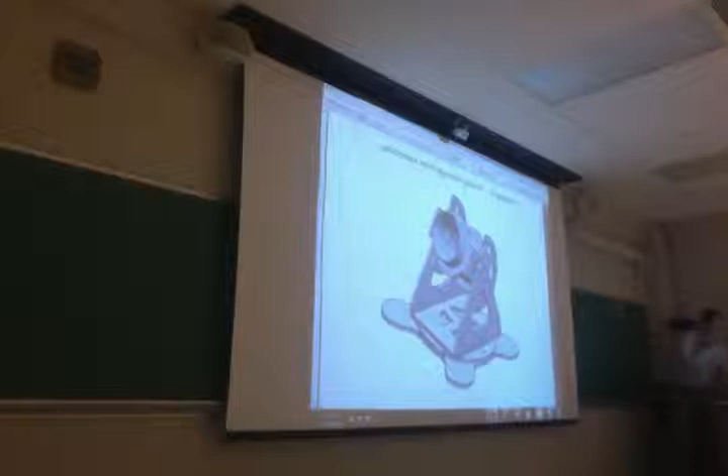The first thing we need to go over today is something interesting you can do with assemblies. This is pretty typical, as you'd expect. I've already assembled this and give you all the pieces, but I don't give you the assembly file. It'll take you like 10 minutes to put it together. It's not a big deal.

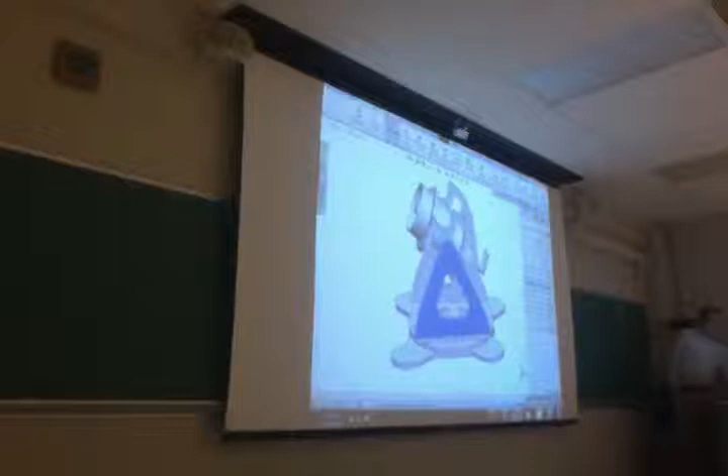You should have the appropriate degrees of freedom. The base should be able to rotate, and this thing should be able to pitch up and down. The missing components that you'd finish this off with to make it a real part—you'd put a gear drive so you can control pitch with a microcontroller or something. So you can put a camera on the back and follow some sort of star or galaxy and get a really good photograph of it.

Is that a wasp in here? Yeah, that's nice. Let's see who gets unlucky.

So that's what we're working on this week. This telescope, if you care at all, is actually one that I own. I was making this part a few years ago and thought, that'll make a good enough lesson part for people. So we're designing a mount for a real-world telescope. It's an 8-inch Schmidt-Cassegrain telescope—it's a reflector, and it's a nice little bit of kit.

One thing you can do with assemblies that I didn't mention previously, or even in previous years—I want you to try to figure out the difference between what this is, notice I can still move it, and this guy. What differences do you see?

Did you make the part from the assembly? Yeah, that's what happened. You notice these are dumb solids—they have no components in them. It's a part made from the assembly. You can save assemblies directly as a solid part, but you lose the ability to control the motion.

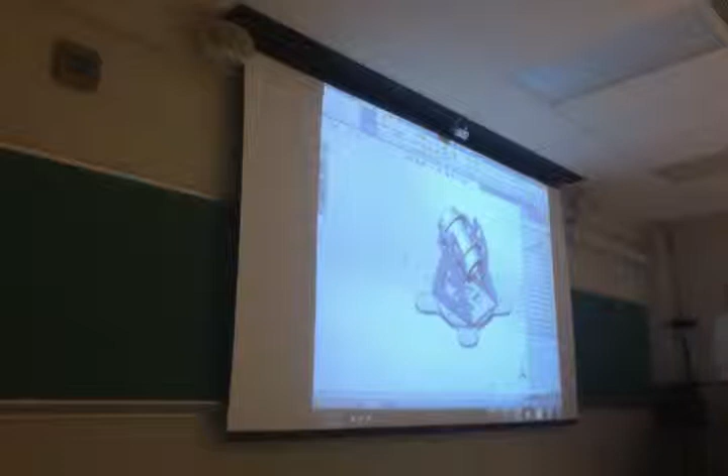They're fixed—you can't go here and change them. It kind of dumbs everything down, but it's a good way to handle things. Say there's something really complicated you've been working on, a whole formula car, and you want to send it to somebody to do some neat renderings of it. Or you want to send it to some other school or somebody else, and not give them full access to all your parts to be able to change them. You can send it like this.

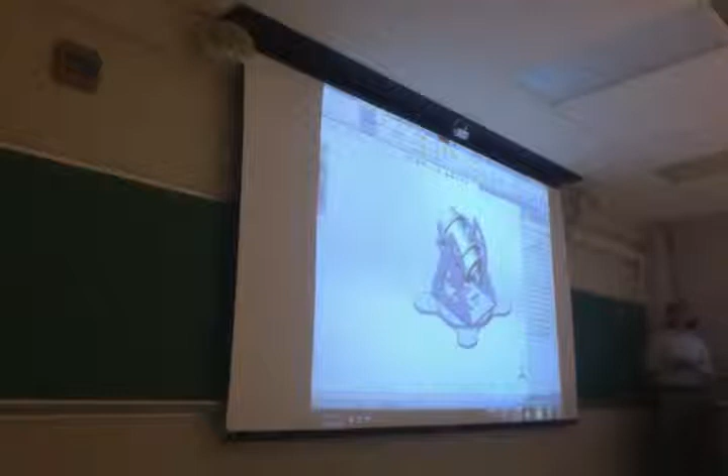So when you change it to a solid part, can you change it back to an assembly? Because I did that by accident on one of the homeworks before, so I had to redo it. I don't believe you can go backwards—it doesn't save all the mating information or all the parts with it. By definition, it just saves—I think it uses IGES files—it includes them and puts them together, so you can't even rotate it. It's just a bunch of fixed stuff. You can glance at it as a whole, but it basically becomes one big part. It kind of simplifies everything.

So the smaller file size can be helpful sometimes. These files can be kind of cumbersome for computers to deal with on occasion.

So anyway, to do this, it's quite simple. As you'd expect, just go to File, Save As. Whenever you get this question, it's basically asking if you want to check and make sure all the relations are good before you save it, and usually the answer is yes. Save new name, save as a copy—I usually do save as a copy. The descriptions of what the differences are is right there in the menus.

Instead of selecting solid asm.sldasm, go straight to this and choose part.sldprt. It's the same exact format as all the parts we've been making throughout the year, and so we'll save it as a solid like that. So that's how you do it—that's how you create these kind of dumb assembly files.

They can be quite useful if you need to share some information without sharing everything. This can be useful if you like a certain configuration of your assembly and want to take steps toward making a 3D print of it. You can put it into a part and add the base or whatever reinforcing material you need. Maybe you had a connecting strut on your formula car that if you just 3D printed it in plastic would snap and break, it wouldn't even hold its own weight. So maybe you need to beef that up a little bit, and it's easier to do it as a part. Anyway, that's how you do that.

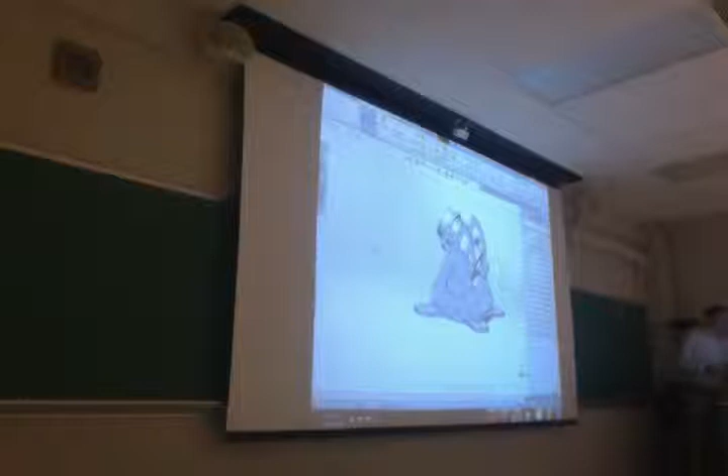We're done with the part version. Is this part of this? Yeah, it's a part. Just know that can be done.

One thing that's very useful in assemblies is you can create alternate configurations. We did that a little bit when we discussed design tables and parts, but even more common than doing a design table is alternate configurations in assemblies.

So again, you're in Configuration Manager, and all you have to do is right-click up here and say Add Configuration. It asks you for a name. I've conveniently also given you one of the telescopes with a Canon 7D, which is a DSLR camera. I'll just name this configuration that. So you see we have one configuration called Canon 7D camera and one called default. We have the Canon 7D activated right now.

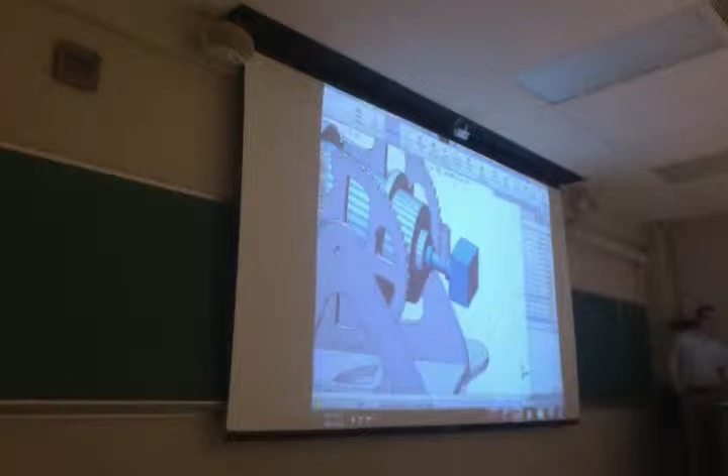So any changes I make in this tree, if I hide or show items, if I suppress or unsuppress items, that'll be saved in the config. So what I can do is go over here and unsuppress this 7D, which we've already mounted. You see I have both, there's two parts actually existing simultaneously in the same space. You have the Canon mounted camera and you have the telescope with just the optical viewing port. So I'll suppress the optical viewing one. Now this configuration, labeled Canon 7D, shows a box with space reserved for that camera. I didn't want to model every detail, every curve of the body of the camera, so I just made a cube that represents the entire volume of it.

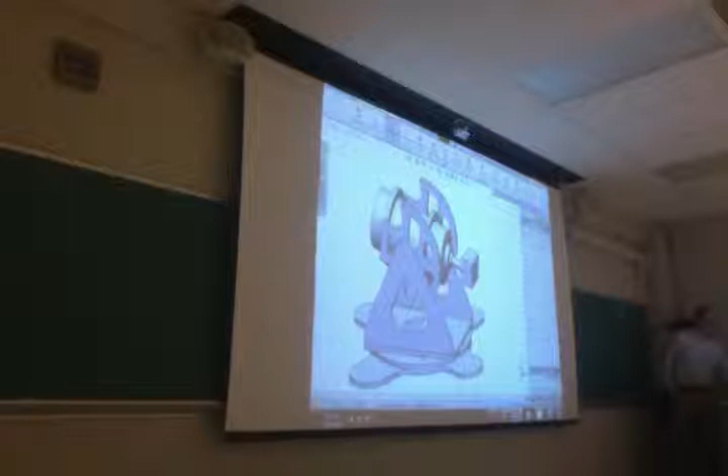So in Config Manager, if you switch back and forth, you're also switching back and forth between views. You have one that shows the camera, and one that shows the direct viewing application, so it's quite handy. You can see how that really helped you. Say you had different configurations for your Formula car, or different configurations of your AC-72 yacht you want to go out and beat the Kiwis with. You can switch between them this way and see what's actually different about them. So it's kind of handy.

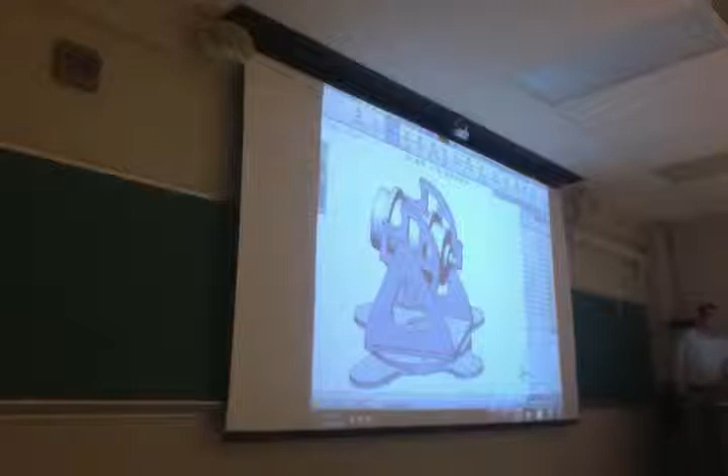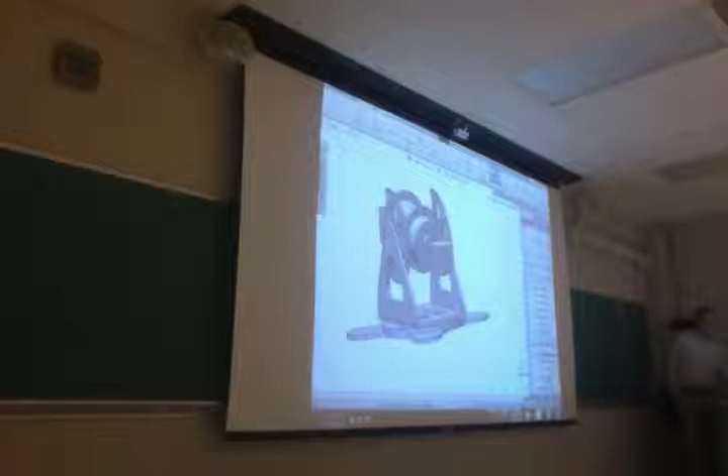Let me activate the camera configuration real quick. We have this guy open. I want to make sure that as this telescope is pitching up, like say I'm tracking some object going straight up in the sky, the camera isn't going to hit the base plate and get cracked off by the motors, breaking lots of expensive things and causing me to have a bad day. So right now, is that camera going to hit the base? Who thinks so? Okay, who thinks it's going to miss? Who really doesn't care? All right, so anyway, we can move the component and turn on collision detection. Remember, this is where we also did physical dynamics. You have the option to tell it to stop at collision, and also to beep at us. Where's that option? Sound, yep, it's already checked, okay.

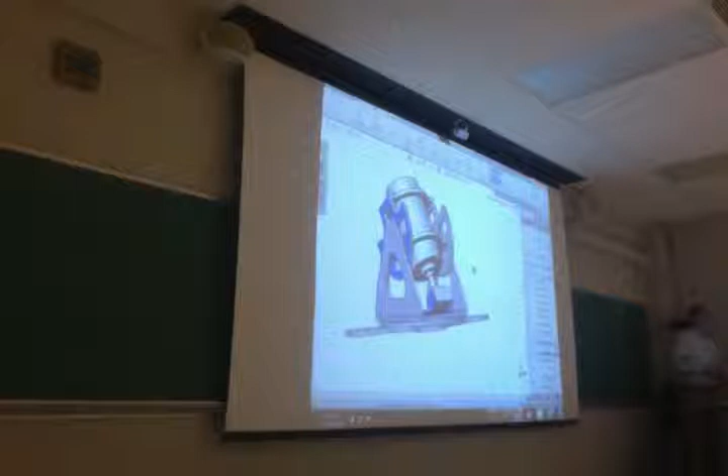So anyway, all you have to do in this case is grab the part, and then you see it in fact does hit. It highlights the surfaces and faces that are interfering with one another, so you can check your kinematics for conflicts. You can check your parts and mechanisms you design in the assembly manager to see if they're going to interfere with one another. So that's a good way to check things out.

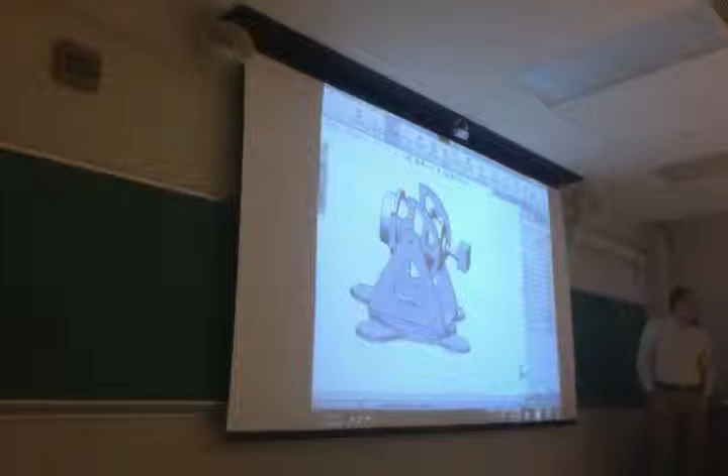What do we do if we want to fix that? We can't have that be a problem. What's the easiest, quickest way to go about fixing it? Take out the camera - then you can't take a picture of it. What? Make the two triangular legs solid.

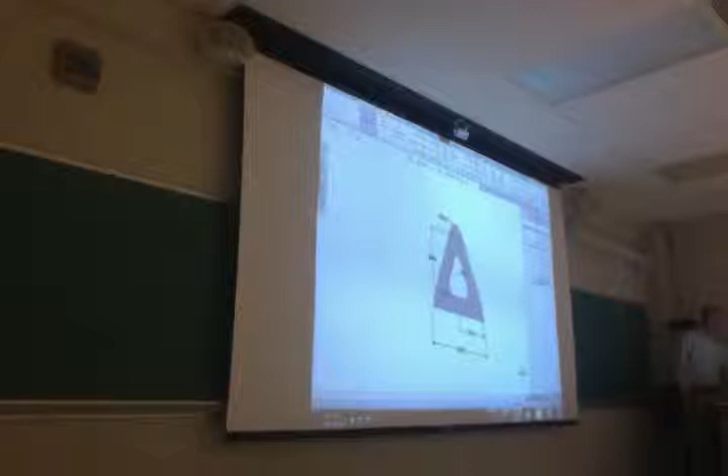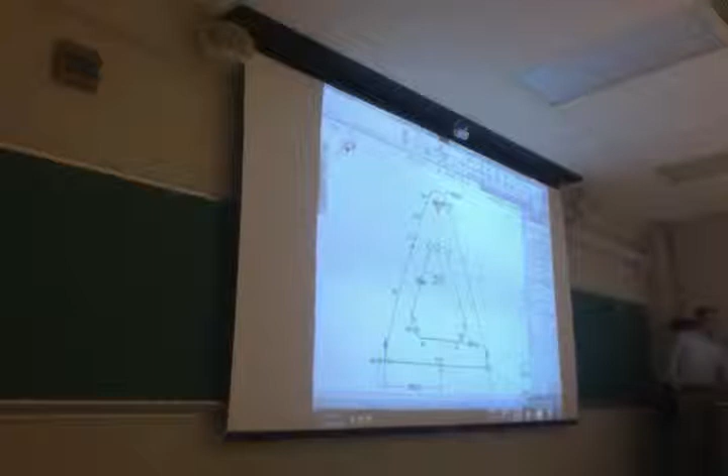This is actually a very simple thing to do. All you have to do is right click on those legs, say open part. If you're dealing in assembly, we have the part right there, and you can see it's all one boss extrude. You can view the sketch, edit it. I've got this set up, so all you have to do is go in there and say, 14 wasn't enough, let's try 20.

Everything changes - that's why you want to go about setting up sketches appropriately, so if you change one main dimension, everything else kind of stays where it should be. The relationships between dimensions are set up appropriately, so you capture design intent. You could dimension this differently - there are tons of different ways to dimension sketches. But if you did not capture your design intent through the way you dimension the sketch, you change that dimension and things just go crazy.

I'm sure you guys have seen that a little bit as you're working - you try to drag one line and the rest of the lines just go off into space. So yeah, that's the way to take care of that.

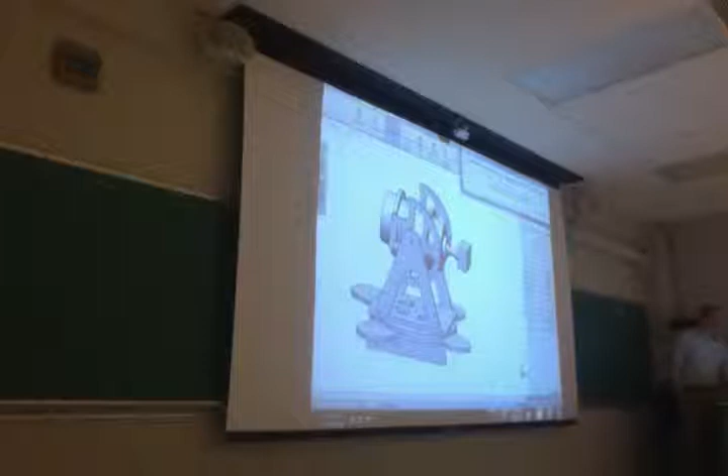Let's go back here. It tells us the model contained in the assembly has changed - do you want to update it? Yep. So now it's much taller, and obviously it's not going to be a problem. Spin that thing around all we want. For the sake of making the drawing, I'm just going to undo those changes.

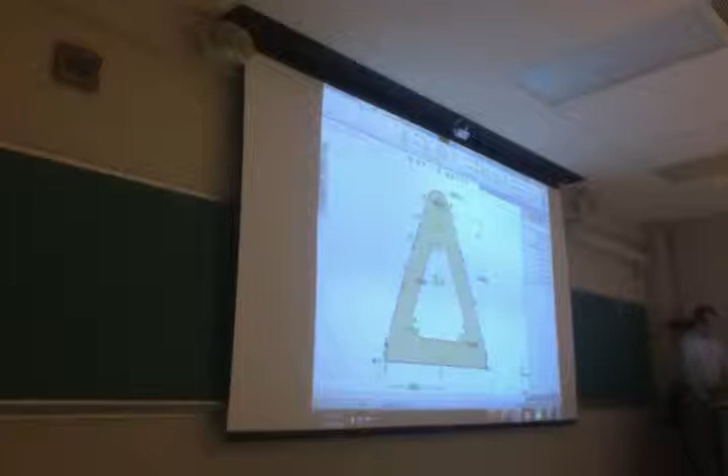We're going to leave it interfering for the moment. Switch back, let it re-update and re-evaluate - that's what it means by rebuild. You notice when I switch back, those arms are no longer on the base plate. Whenever it went and rebuilt all the constraints, it realized I had to move everything back. So that's what's going on there.

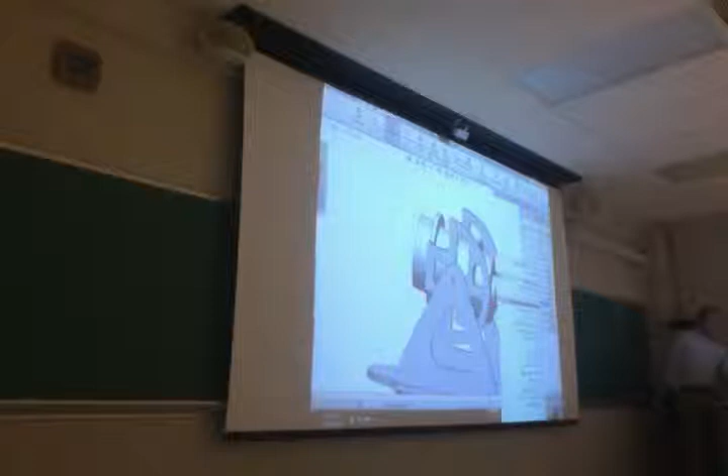I have a question - could you put the camera on top of the ocular viewing thing? Like the other configuration, where it's got the L, and then put the camera on top of that? Could you? Yeah, I mean, you certainly could. Some people definitely do that.

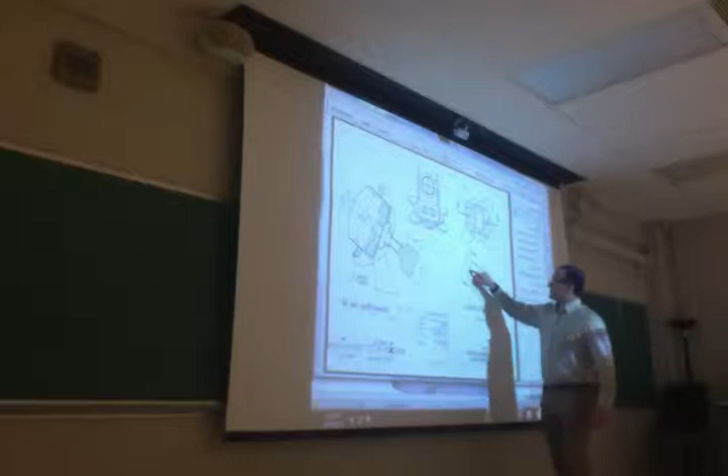Just as an aside for optics, the reason why they oftentimes get the straight shot right into the mirror - the mirror is even modeled. Let me pull up the PDF you guys have to make. Okay, right here, on the right side, the main bit of light comes in. This is the main reflecting mirror, it's parabolic, or roughly. Then you have one more mirror up here in the front, this little disc. So the light comes in, bounces off the back, hits the disc, and then comes right into the camera. The reason why astronomers mount the camera directly back here, instead of going through another bend, is that inside that 90-degree bend is another mirror, so 3 mirrors total.

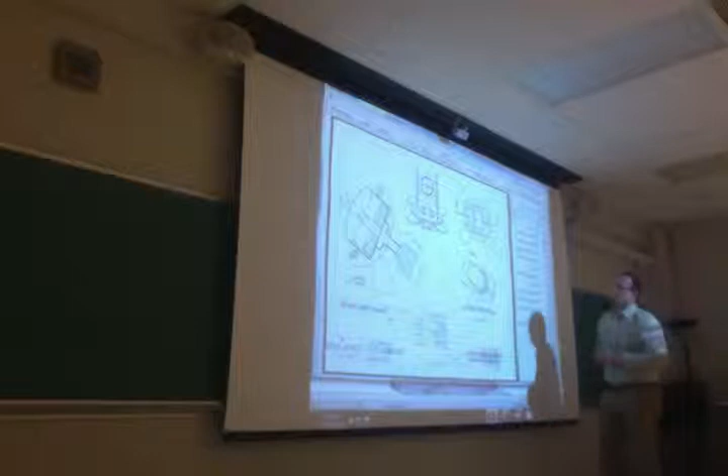Every time you bounce light off something, that mirror will absorb a fraction of light, and it messes up the pathing. That's why telescope guys are so persistent about the shape of their mirrors, because even a little tiny bit of roughness really messes up the image. So the fewer bounces you go through, the better off you are. The fewer lenses you pass through, the better off you are.

So that's why they do it optically, but yeah, you certainly could to save some space.

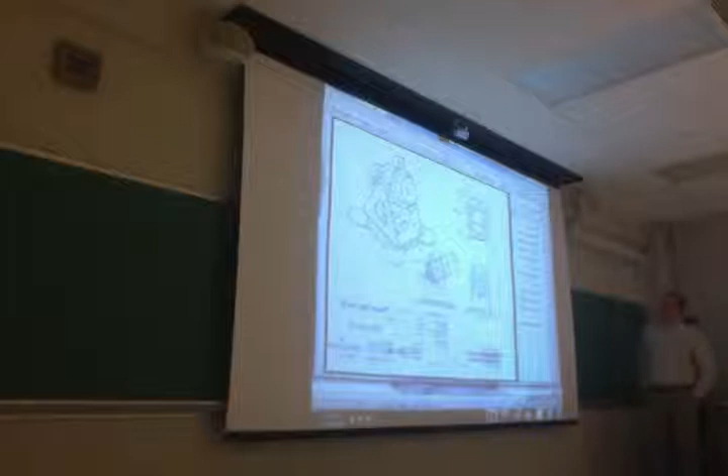So this is - I went ahead and pulled it up. This is the drawing you have to recreate this week. Once you assemble a telescope, this is pretty straightforward. This is what you did last week with a part - it's just rehashing the same things you've learned to do, but with an assembly. It's not anything different.

May as well go ahead and create that right quick. I'll just go to File and make drawing from assembly. It's telling me that I already had that made, but I think it's A-size paper. It's like, are you sure you've already done this?

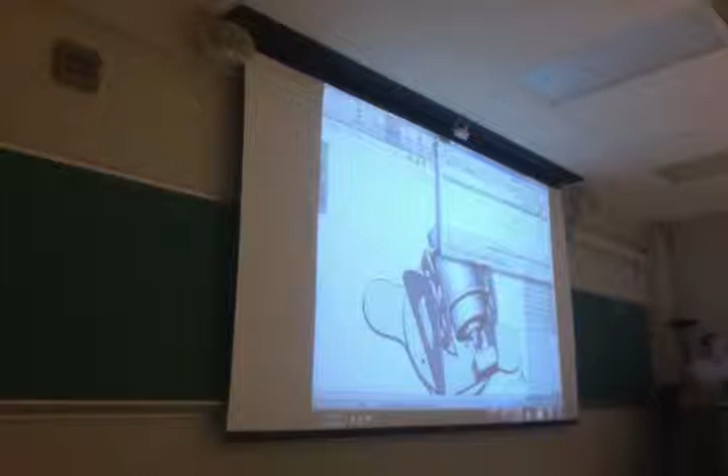Go to model view, just browse for it. This is what I wanted to show you - remember, the most helpful button I know of when making drawings. Whenever it asks you to make a drawing first, it just gives you the box. Always remember to check preview - it's going to save you a lot of time to see which view you're actually dealing with. So in the actual preview that we want, we need probably the front view.

I have to go. The reason it's messed up is because in the actual SolidWorks file, the orientation is a little bit off. So rotate this back to be square. I could certainly orient this any way I like.

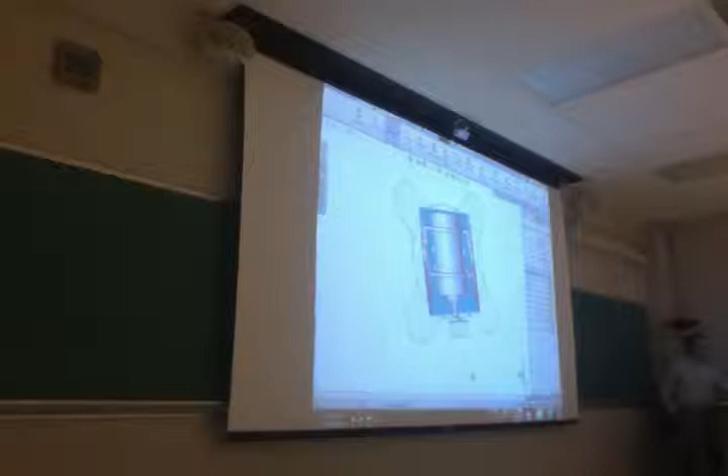I can update the drawing. See the changes propagated. So having this oriented properly is going to make your life a whole lot easier whenever you make the file. So let's take a look at what we need to finish here. Orientation is just highly wrong. Show this side. Just warning me that the dependent views will change as well, and I'm fine with that.

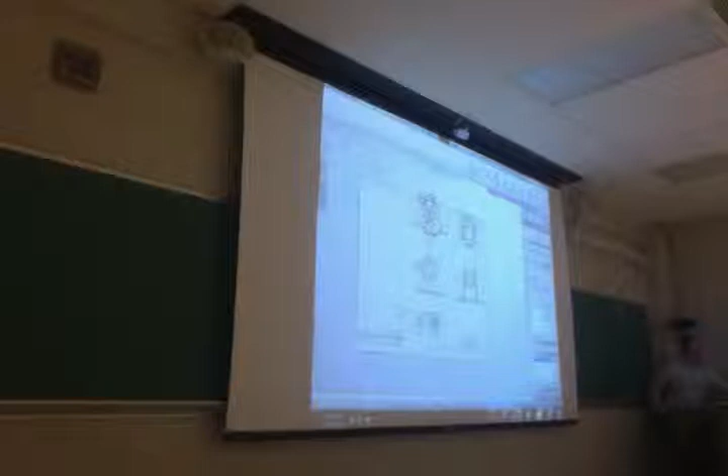So you see, what is it called whenever the other views move with this one? What is it in SolidWorks that keeps those? Is it the parent view? That it deals with that, yeah. The one that I'm moving right here is the parent of the subsidiaries. But what is it called that we need to break if we want to move them around independently? Alignment, yes. The isometric view obviously doesn't care about alignment.

In the drawing, we have the isometric at twice the scale of the others. So what do I do to change the scale of the isometric? Click on the object, right click on it. Or you could right click. Easier way to change scale: just click on the view, go down here and use a custom scale. So do 1 to 8, or whatever I like, to match scale.

How do I change, I believe in the view, in the drawing, which is extraordinarily tiny, this is showing hidden lines in that subsidiary view. How do I get it just in that view to be hidden lines?

Right click on it, show. Right click on it. Do what? Go to show, go to display styles. Push the blue box on the side screen. Do that, or you just click here, you click that. Which honestly, using the menu here over to the left, you've got a lot of options there, it's probably a quick way to do things.

Right now, I still have that poorly aligned; I would probably try to do a better job lining that up before starting the drawing. I was just going through this, how do I create another sheet? Because this one, we'll just say that's good enough, I'll add the dimensions, you guys get the general idea, don't waste your time. How do I add another sheet to this? So this is a lot of review this week, because it's just exactly the same as parts.

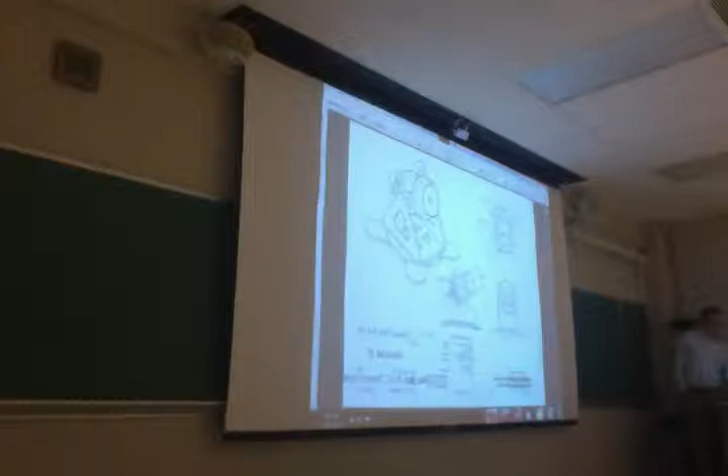All right, so let's look at the second page. What do we have to do on this? Who knows how to make that view? Oh, Exploded view. Exploded view, so you get to the back. You said you do know how to make it? You're very confident. I know how to make it in Inventor, but not SolidWorks.

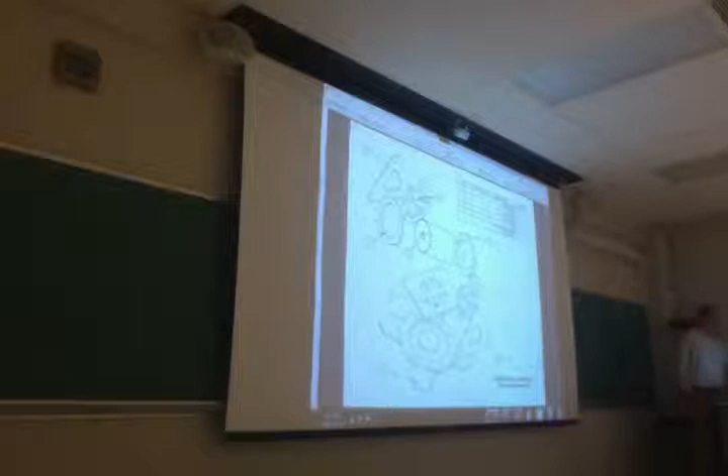It's actually quite easy. There's no need to go back and actually go through making another, what would I call it, another assembly or exploded state. You just can use Create Exploded View up there. You just click on the exploded view button, and it brings up this dialog box, which basically allows you to grab the parts that you've assembled and move them in a single direction.

So we'll just start, like what would be a good part to kind of keep centered? Think about when you ever do the base. The base, right, okay. So let's keep this base, the rotating one, fixed, and we'll take this one and move it down a little bit. So you simply click on it, move it green down.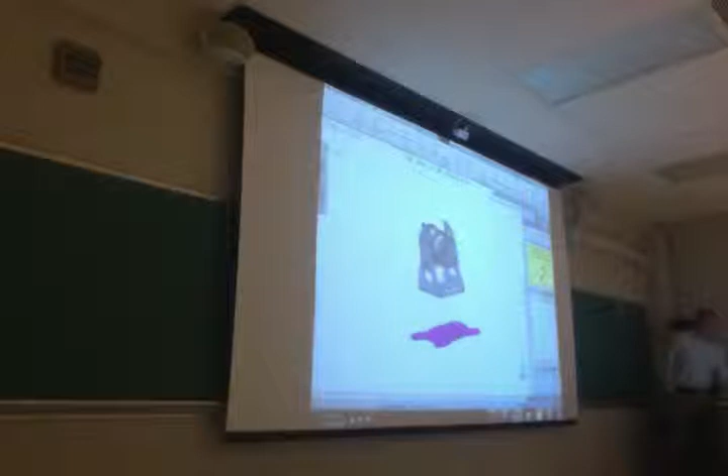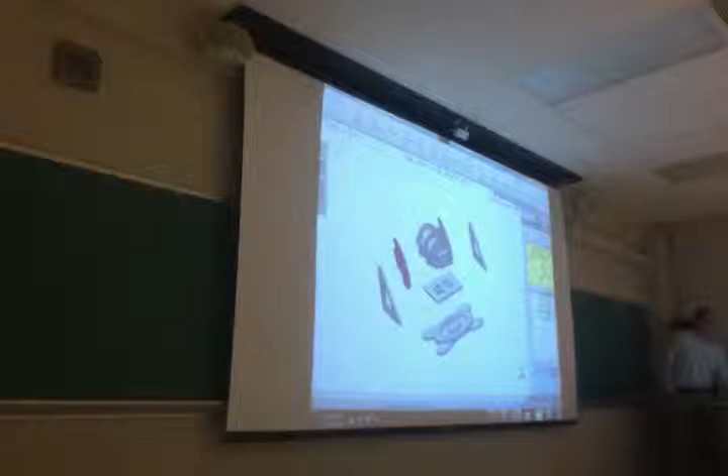Then you can click these sides, click on the red arrow, pull it out. You can do a controlled distance, but this is just stupid easy to do. Drag it out. Oh, come on, Hayes. There we go. This isn't a problem, it's pretty easy to do, even for really complicated models. You can drag this and push it straight out. In fact, is it tilted a little bit? I probably shouldn't tilt it.

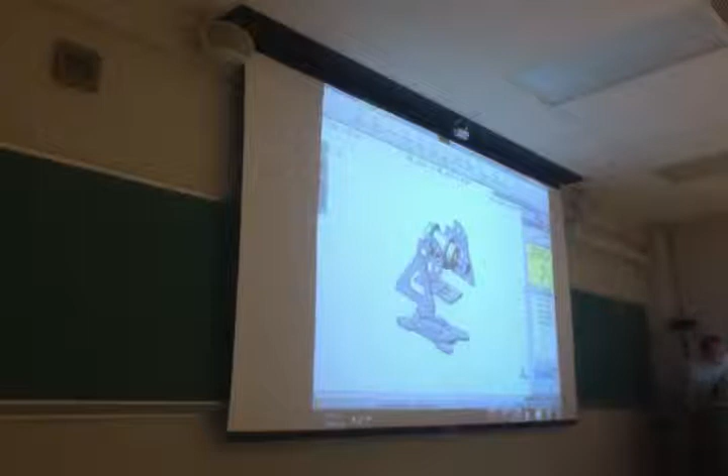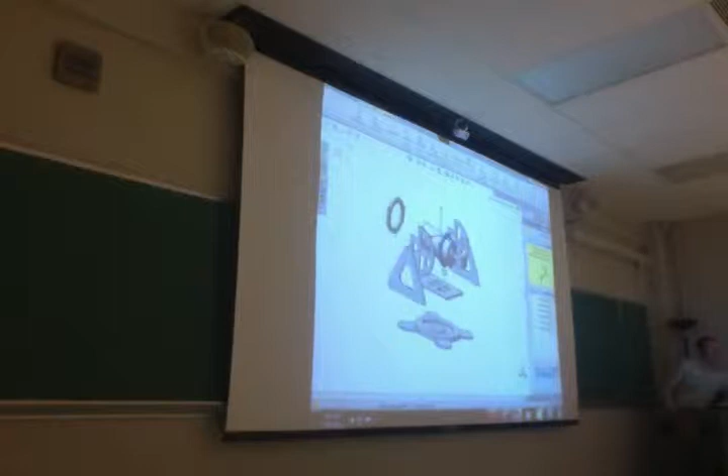You'll see that I'm only getting cardinal directions when I click on this, but if the telescope was pitched up, which this one is slightly, I should have pitched it up more to be more descriptive before I did the exploded view. Notice when I slide this forward, it's actually starting to interfere with the part itself—it's not going down the axis. So let me delete explode step 7 to go back to where it was.

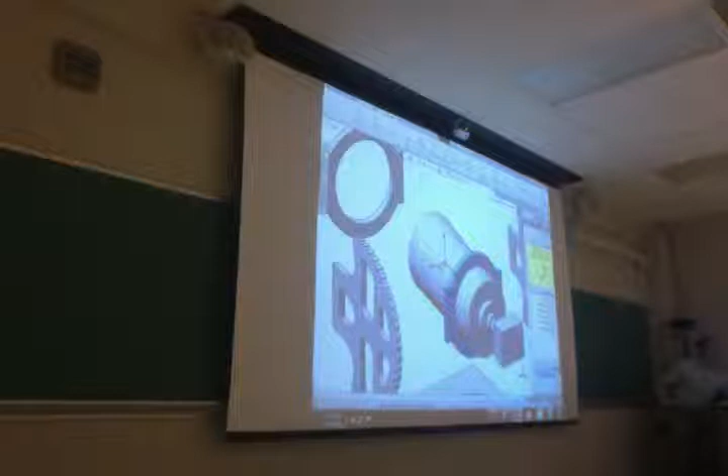If I want to move that directly down the axis of the telescope so it slides off like it would in real life, right-click on this hub—this is a good note to take because I get a lot of questions on this every year. Right-click on that hub, say align with selection, and select that back face. Now that blue vector is perfectly aligned with the telescope, and there you go. So now it's no longer going to interfere with it.

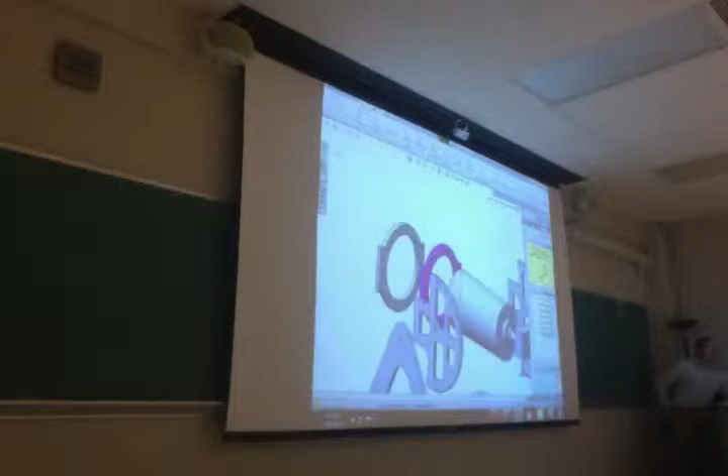So you see the difference between the one that I dragged off straight in the X direction and the one that I dragged off axially around the telescope. That's all you have to do to create an exploded view.

One thing that's kind of nice is if you go to Configuration Manager, open up that tab, Exploded View 2, you can animate collapse, which will basically undo everything. You can save this as a file, as a little video if you wanted to.

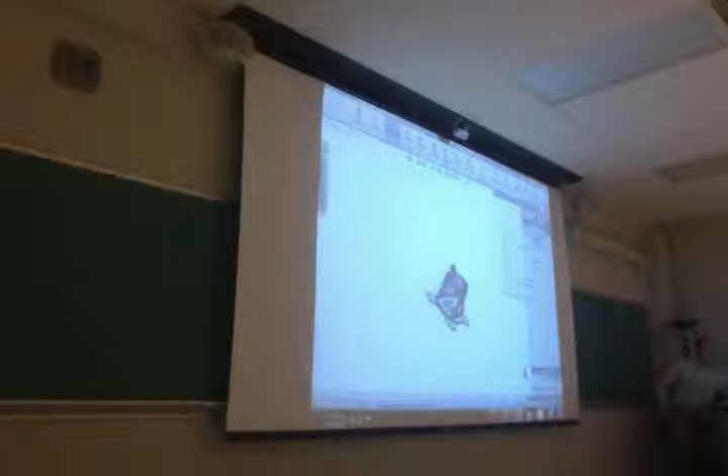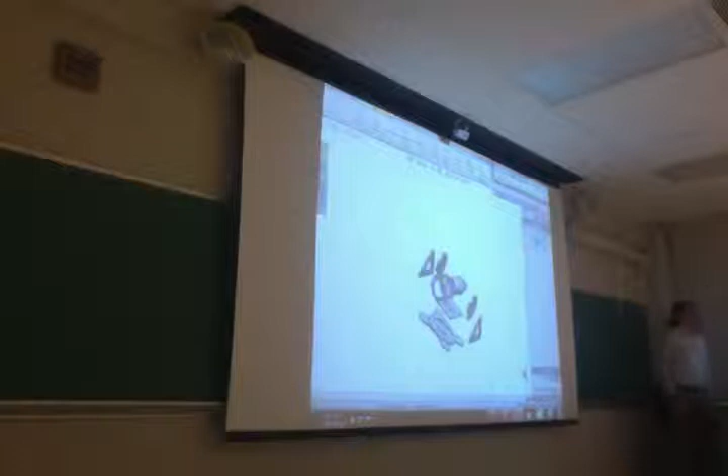Probably the more interesting thing is you can animate the explode, so it shows your device coming apart, or you can show it being put together. That's something really easy to do, something that really kind of wows people in presentations, and it takes about 4 seconds to make. Keep that in mind.

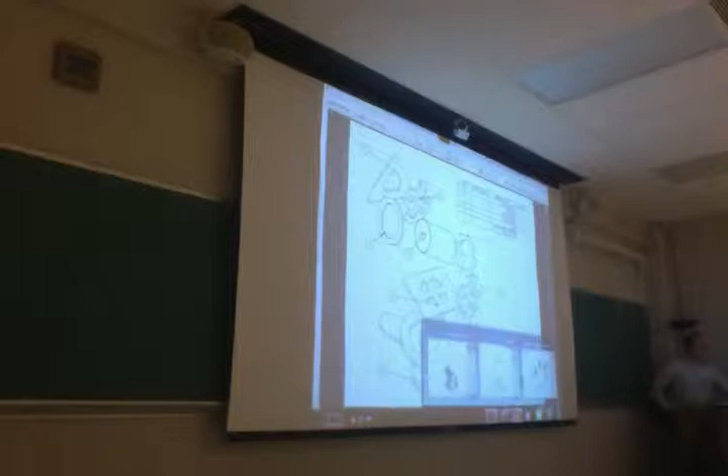So, adding the exploded view to a drawing is the next step—we'll create sheet 2. One other interesting thing about sheet 2: where did the format go? All that big block of information down here is gone. A lot of times I like to keep drawings clean, especially if they're an informational view like an exploded view is—it's not necessarily a dimension drawing. So you just grab sheet format 2 and delete it.

It's gone. Annotation, put in a model view of the simple telescope. Notice you have options here—you have the configuration you want to use. We have the default showing the direct viewing for optics, and you have the camera configuration. Underneath that camera, you have the option to either show it or not show it in an exploded state. In this case, we definitely want to show it exploded, so there we go.

Change that scale a little bit. I can make it go solid if I wanted, but I'll keep it this way—12, I'll go bigger, 8. Yeah, that looks great. How do I rotate this view?

So I need to make it look like this, but it's facing the wrong way—towards the top of the screen. There you go. When you click on that, you can finally spin it around. Whenever I tried to do that on my homework, I was never able to.

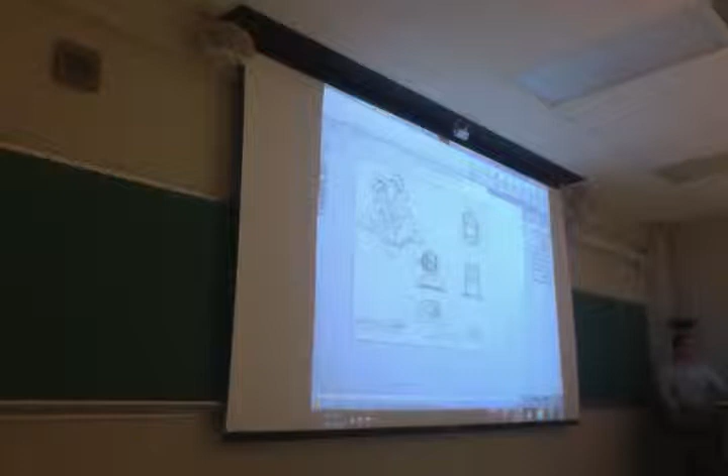Click the green checkbox. Right, that's the thing that happened there. Remember how I made this isometric view as a child of this drawing? If I try to do the same thing up here, I get your problem—notice it won't let me click the green checkbox. You can only shift independent drawing views, because if you do it in the traditional 3-view drawing, you get a front, top, right.

And the isometric view—I believe there's no perspective in isometric usually, but the lines are angled at 30 degrees, something like that. There's a standard it's trying to follow. That's why it doesn't let you mess it up—it's trying to protect yourself from yourself.

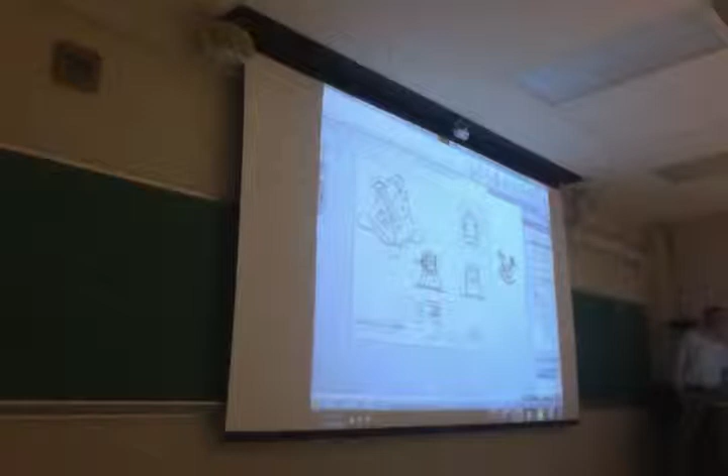So if you do want to maneuver things, just go to insert an independent model view, isometric, and then notice that one's still exploded because I didn't check the right box, but you can manipulate that all you want. So that's what's going on.

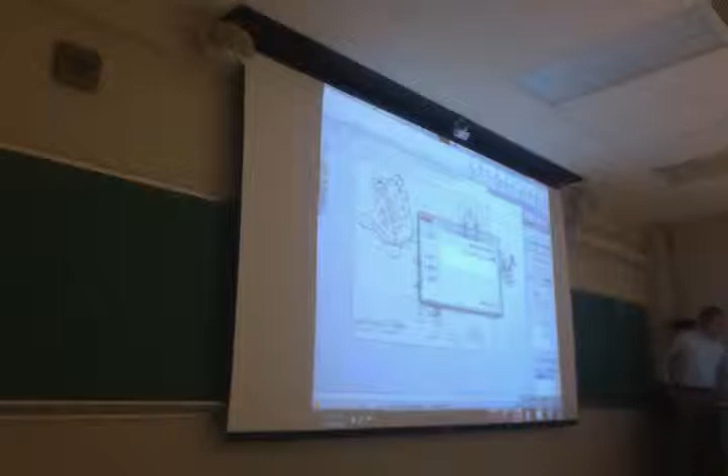All right, so we have the exploded view in, but now we have all this other junk we need to add into it. These drawings are actually very, very useful—you'll do them a lot for parts that have to be assembled for people. This up here on the top right is a table called the bill of materials. They're a huge pain to keep accurate if you have to do this manually—like how many screws do you need, how many bolts, how many pieces of wood go into your design, how many square feet of this or that.

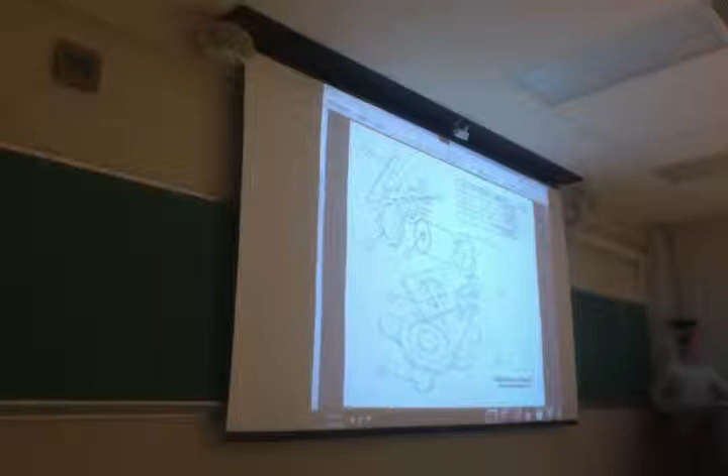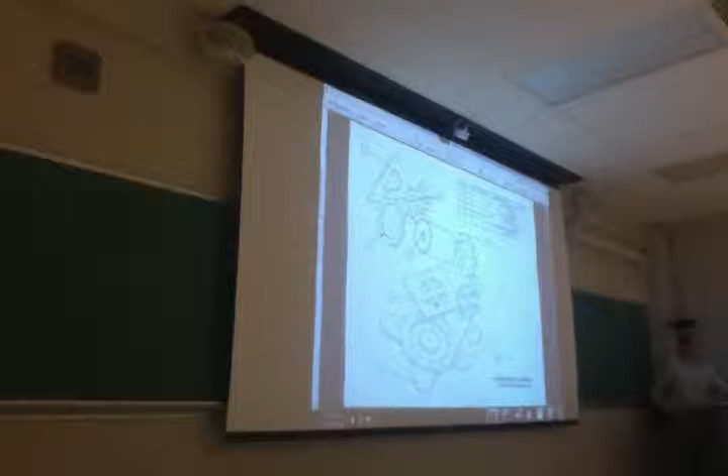How many Legos in the box? You can have a bill of material built for a Lego set. It's a perfect example. They're a huge pain to actually do by hand, but thankfully SOLIDWORKS does it all for us.

It knows how many of each part are already in the assembly, so why wouldn't it just make it? Go to Insert, Tables, Bill of Materials. Select a drawing view to specify the model for creating it. Which view do you want me to create the bill of materials for? Exploded view makes a lot of sense. Use the standard bill of materials template, top level only.

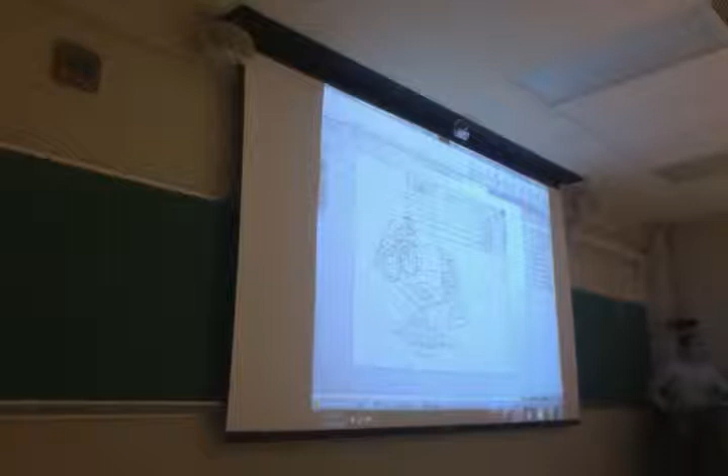Usually all these options are just fine, though you can change the weighting of lines and everything else if you want. I'm not too worried about it. We'll just click OK, and it's done. It automatically references the assembly and tells you how many of each object you're going to need. If you change the assembly or change the view, it updates the bill of materials.

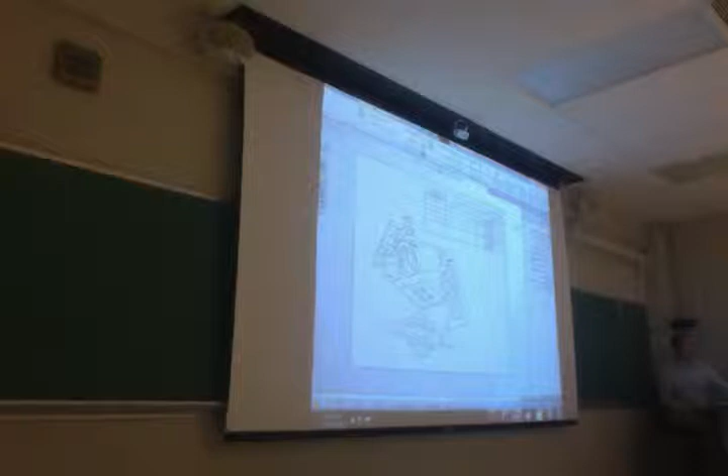The ultimate awesomeness of this drawing feature in SOLIDWORKS is that you can go to Annotation, Auto Balloon, click on the drawing you want, and it automatically references the bill of materials. It tells you which part belongs to which line, so you can very quickly idiot-proof the assembly of your design.

It's a very common task that engineers do all the time, so they've pretty much automated the entire thing for you. I guarantee knowing how to auto balloon will save you five minutes on your final exam. So know how to auto balloon and manipulate these things, because if you try doing this by hand, you have to make sure the numbers correspond and everything else - it's a lot.

You have different balloon alignment options - you can have them all go above, below, to the left, or to the right. I kind of like the surrounding option. Just say okay, and then you can manipulate these a little bit, moving them to reasonable places. Obviously, off the paper is not going to do you any good.

I'm sorry. Thank you. That's a very nice courtesy laugh.

Anyway, so there we go - bill of materials. You can insert descriptions. If your part file has a description in it, saying what it actually is and what it does, or how you put it in, that'll show up.

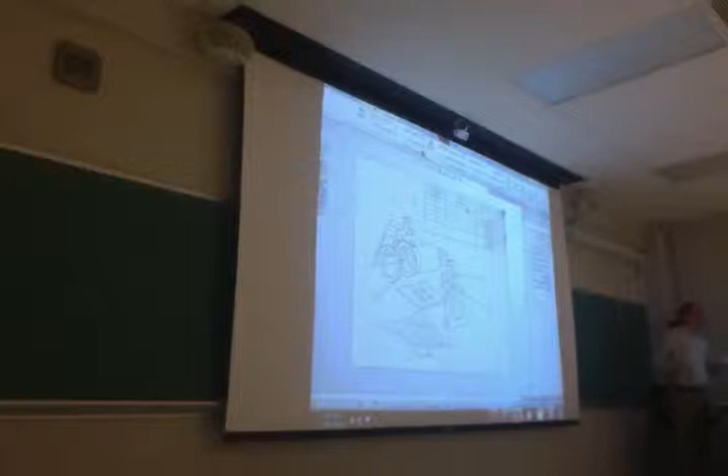You can change some other columns if you really get into drawings a lot in SOLIDWORKS. Under bill of materials, sometimes the bill of materials will be pages long just in and of itself, with no pictures to go with it - just 18 pages of stuff you have to buy to build this part.

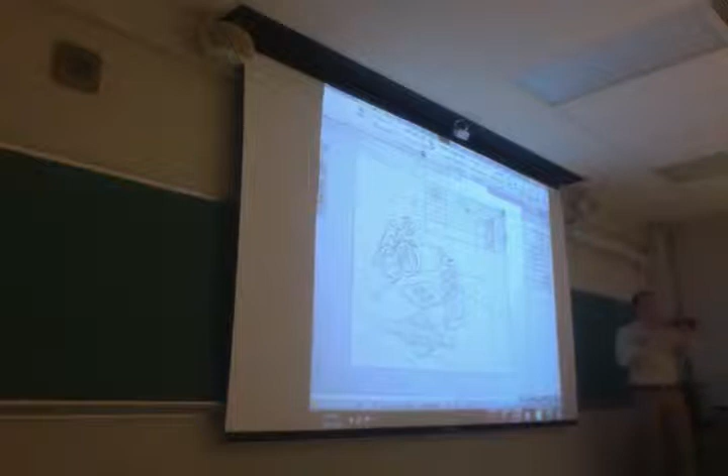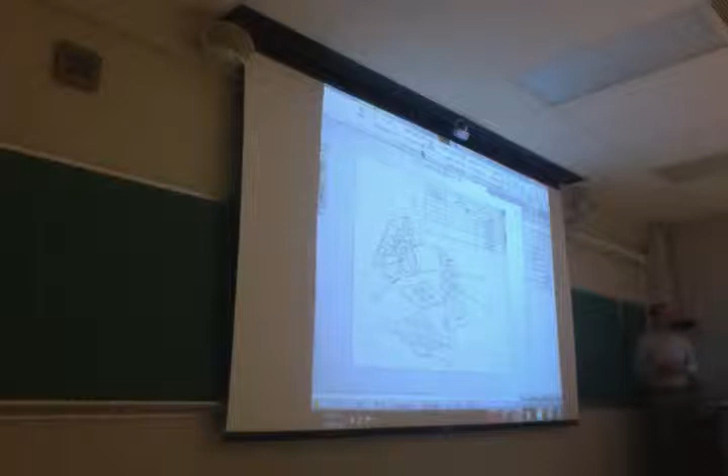One thing that's really helpful, especially with aerospace design, is that you can create a column for weights. You can list not only the parts you need and how many of them, but how much each one weighs, and how much a subassembly should weigh. That's really good for keeping track of the total weight of an object as you're making these parts and telling somebody to go get things - are you on spec? That's a good deal.

So delete format, we've done that. Section cut - we'll make one less drawing down here. What you don't need to put in. So page 3, we're kind of back to the standard type stuff again. Section cuts - what is this called?

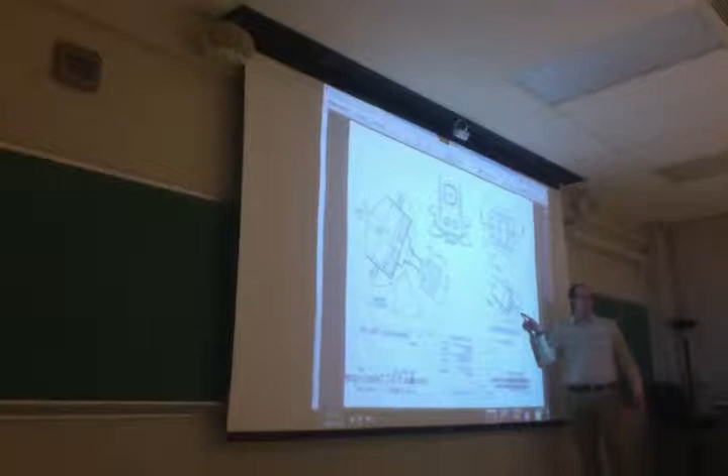This whole drawing is a cross-sectional cut, but specifically circle C - that's a detail view. Obviously that circle C pops up on the right side with a different scale. One thing you will have to add in is the crosshair in the bore of the telescope up there.

2012 made that quite easy. Whenever I did this work yesterday in 2013, it flakes out for whatever reason, but I'll show you how to get around that, because sometimes you just have to brute force a drawing.

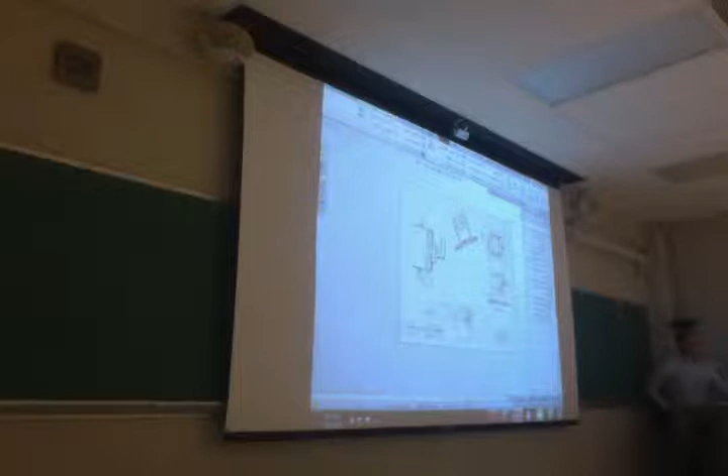Restart the computer. You can go ahead and turn it off, turn it back on again. Alright, well, lo and behold.

Okay, so which view do I need? I need the top down view. Let's look for that. Okay, so that works just fine.

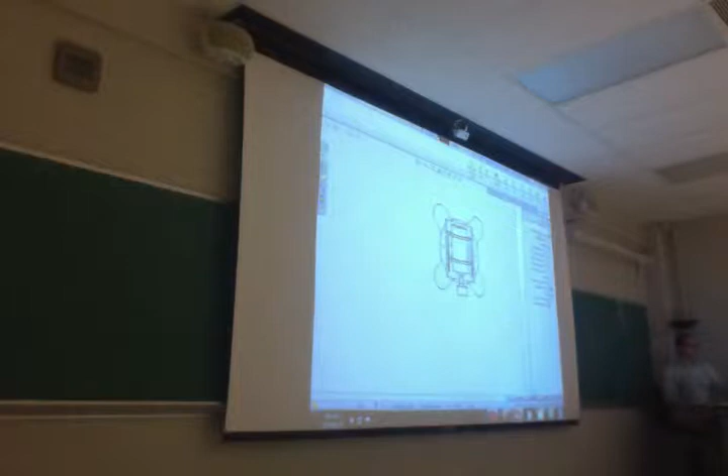The problem is it's rotated. Let's just assume for a second I have that lined up so the telescope is actually straight. Again, why is it not straight in my drawing? Because in the part, it's not... oh, that's not the part. I guess I have the part closed. In the part, it's not straight enough. You can go ahead and add a mating constraint to do that. It won't be an issue.

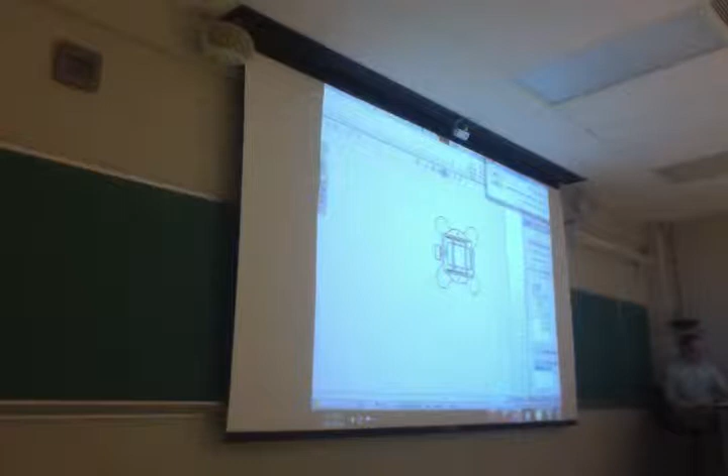Okay, to rotate this, you can simply click on it, right click, and you have the 3D rotate up here, or you have the 2-dimensional rotate. Click 2D, change the drawing view angle by 90 degrees. Apply it. Well, that's the wrong way. So negative 90, apply that. All right, good. So now we're pointing in the right direction.

Do the section cut, we do as we always do, section view, horizontal, good enough. Good enough for teaching. Oh, actually, there we go. So now we have the section cut view of the telescope down there.

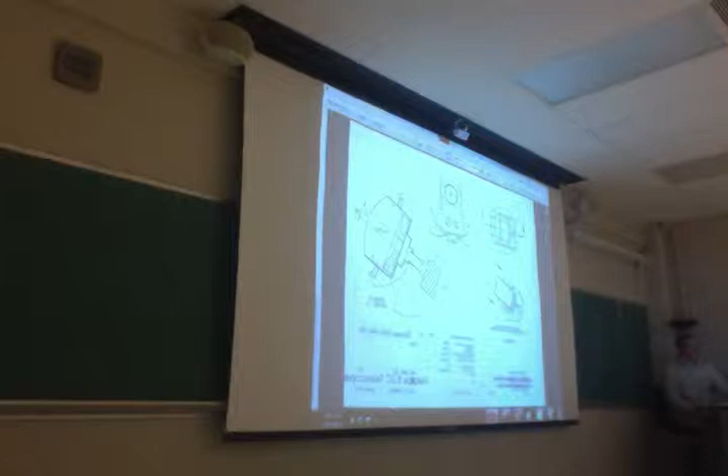The total sheet scale is off. The one thing I really want to get down to show you is the view E. Too many things over at once. Let's change the total sheet scale, or at least the scale of this first guy. So 1:24 will be 1 to 12. Everything is propagated downstream because this one's not only aligned with it, it's a child of the original drawing.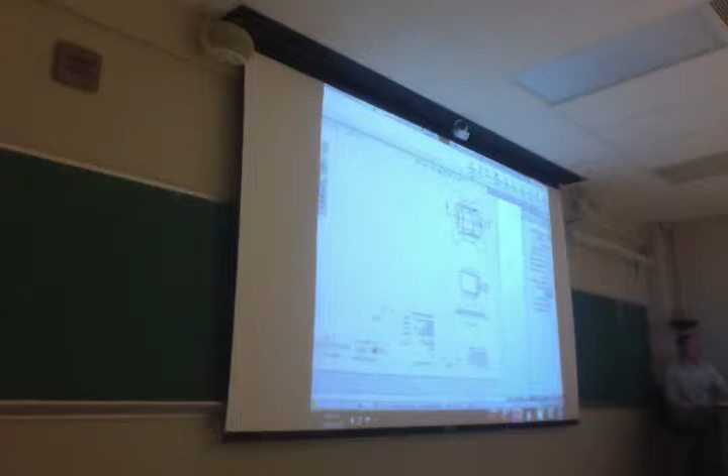Okay, so if I wanted to create a view looking straight down the bore of this telescope, keeping in mind that it's tilted up a little bit, how would you do it? Auxiliary? See, exactly. Auxiliary view. Like that. Go off to the side, now we're looking straight down the bore of the telescope.

Notice it's off center, it's still aligned with it, so we have to right click, break alignment. That's going to become somewhat a common task for you. Drag it up here, 2-dimensional rotate, to get that somewhat vertical-ish.

Nothing can be simple, right? Nothing can be simple. Oh my gosh.

Oh, perfect thing, SolidWorks. It keeps on snapping it. Don't snap. I believe in you.

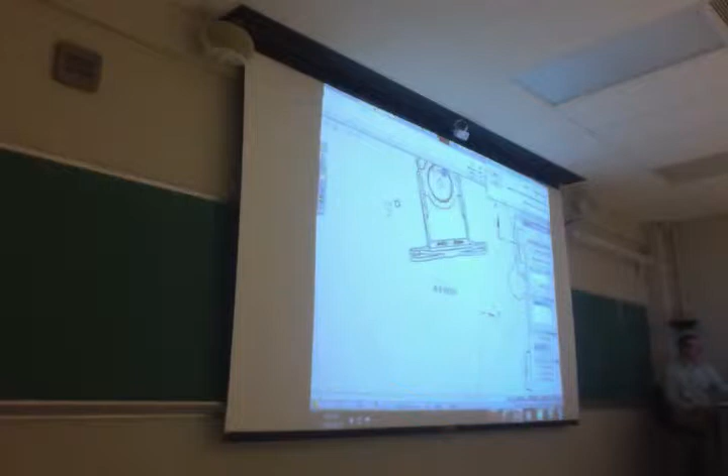Change the angle from the box up there. What? Yeah, I could just type it in. Negative 10 is what it needs. Oh, you're wrong. Negative 5. 5. Oh, 4. Maybe 3. 4.5. All right, good enough.

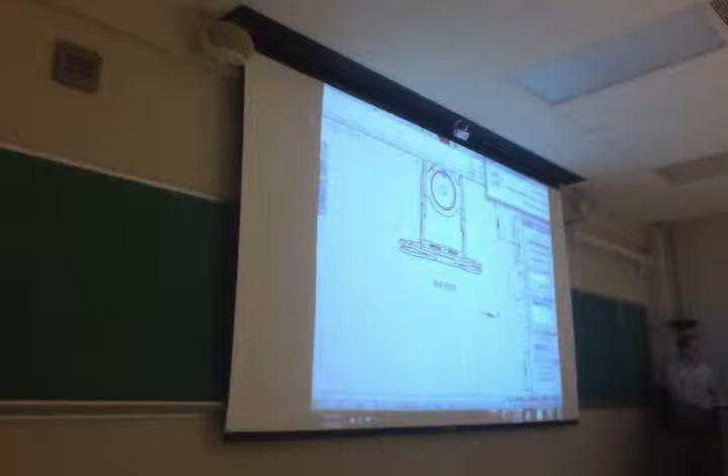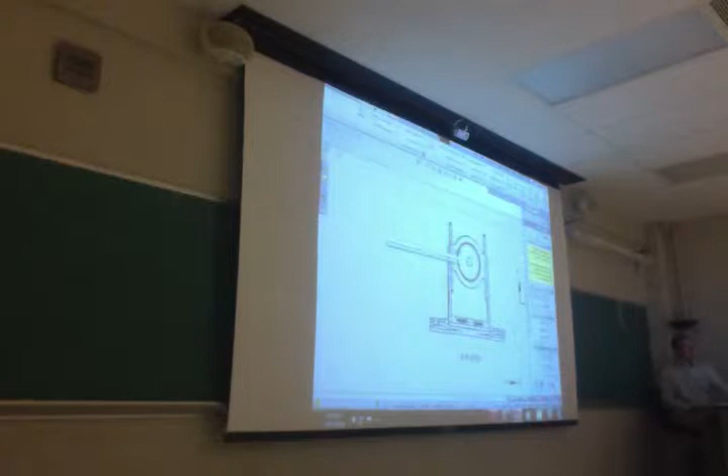Good enough for lesson. Anyway, so now the problem becomes how do you insert a center mark? Normally you go to annotation, center mark, click on a circle, and it works. But it says center marks can only be created on arcs and circles.

Why is that not an arc and a circle? It looks pretty circular to me. Because we're not looking at it straightforward. It's not perfect. In fact, this center mark tool in 2013 is extraordinarily particular about it being exactly a circle shape.

So one thing that becomes kind of common practice, a workaround in sketch mode, is if you want to get a center mark in there, just draw a circle for the moment through sketch, and then you can go back, annotate a center mark as long as you select the actual circle, and it works. So if you need to dimension to a point that you can't click on, or if you need to put a center mark on something that isn't round enough, just sketch in a temporary circle over the other one that will be perfectly round for it. So that's how you can work around those things.

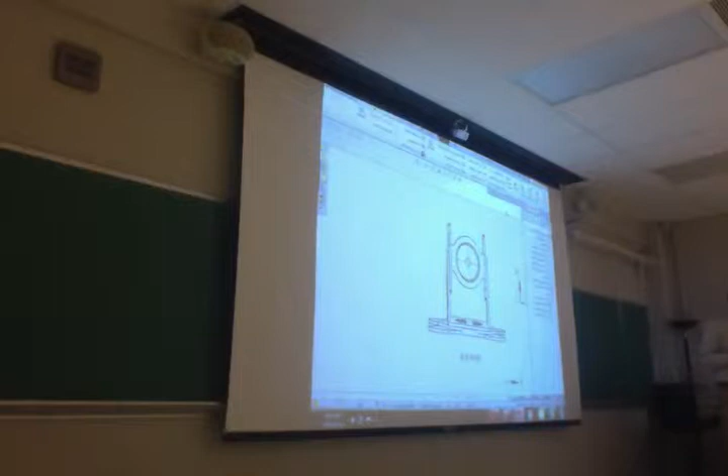How did you make that not perfectly circular? The telescope is perfectly circular. Like the part itself is a revolve. It's like a circular shell. The problem is like when you view a circular aperture at an angle, what does it become? Ellipse. So that's what's happened here. We're ever so slightly off axis.

I think, this way. And it's extraordinarily particular, even a fraction of a degree off. Is there a way to like hide, or give a bunch of crosshairs on things like in the triangular part, it came up and had like all the little circles on it? All of my crosshairs. It's just kind of tedious to go through and do all individually.

What you probably have checked there is a setting that says automatically add crosshairs to all circular holes. You can turn that off. I think that should be underneath the crosshair tool. Otherwise, no, I think you just have to basically go and delete them all. So it's one of the automatic settings in drawing.

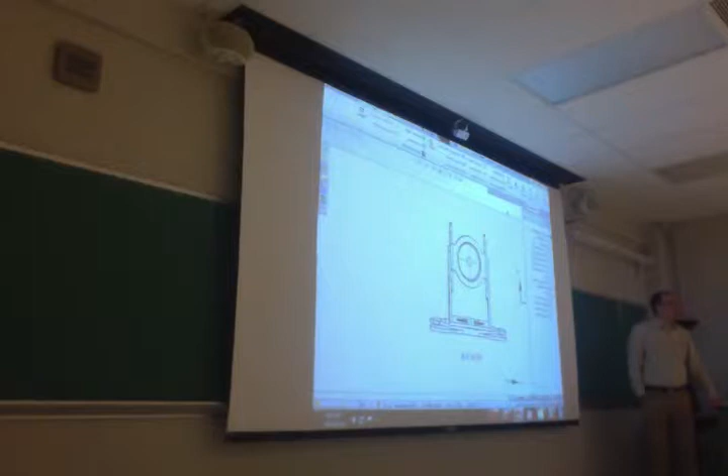3 pages, not a big deal. Create 2 telescope configurations: one for direct viewing, meaning the optical path to stick your eye up to, and one for using the given Canon 7D mount, which is also a part given to you in that parts download zip file. Adjust the parts as necessary. Let the camera mount version pivot a full 360 degrees in pitch.

This means I need you guys to go in and edit a part of your choice. You can bend the optical mount, you can extend the leg, you could... I don't know.

Anyway, save that assembly. Once you've modified the parts and length, save that assembly as a part. Don't turn in another assembly file. We want to see that you guys know what to click on to save as a part, and turn that in. So 2 things you have to turn in: recreate a PDF of the telescope drawing and a .SLDPRT file showing the telescope assembly.

What's the difference between saving an assembly as a part and saving it as an actual assembly? Part is a dumb solid, right?

If you save it as an assembly, you have to also save all the parts with it, and you can still do all the kinematics, view all the relations, and go ahead and change the parts -- just change the whole assembly. If you save it all as a part, then you just get what you get -- it's kind of just a visual representation.

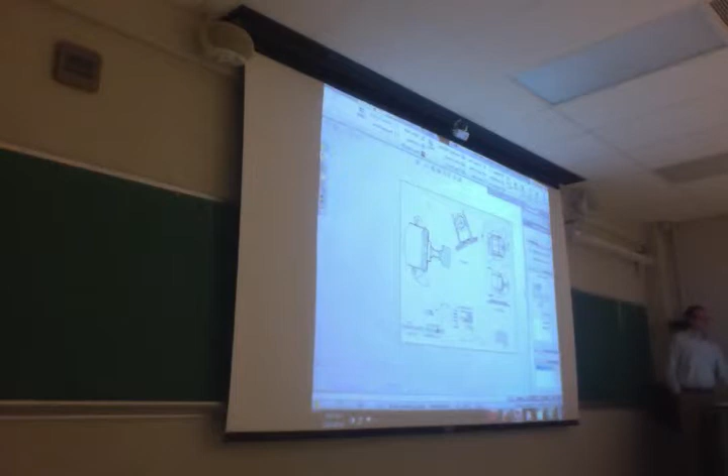Pretty handy. AutoCAD would have taken half a day to make that change, so SOLIDWORKS is pretty good at this stuff.

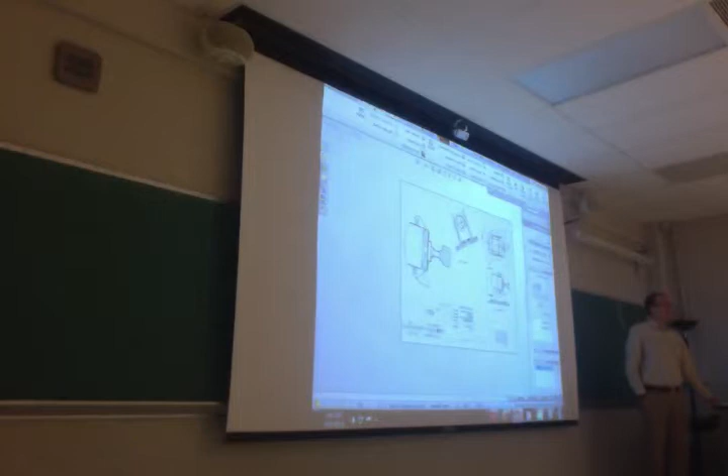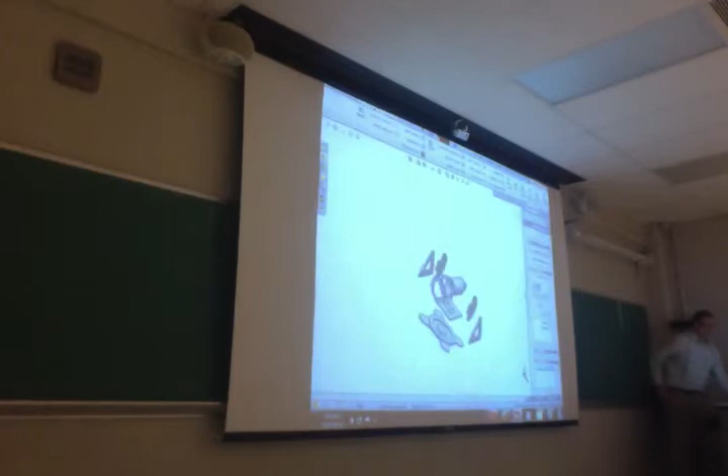How did you create the exploded view? Where is the part? There we go. Okay, I created it by clicking on exploded view.

There's a button up there in the assembly tab. If you want to go back to standard view, simply right click in white space -- you should be able to click collapse, and that puts it back to where it came from. Again, remember we can change this, change the different types of configurations. Both of them are exploded now. Right click, collapse -- you should be able to right click and explode.

Really? Check that out. Oh well, you always right click on this -- show it there. So that's how you go between that.

You can also notice you have the explode line sketch, so you've all seen part drawings like putting together -- I always use the lawnmower example because I've had to do a fair number of those in my life. Just the little dotted lines that show which bolts go into which holes, matching to which things -- that's how you do that. It shows you the little dotted paths between the different holes.